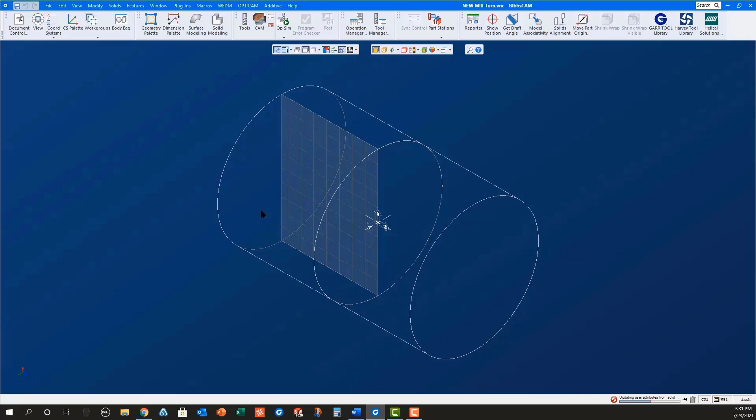In this case, I'm selecting a Doosan twin spindle as my machine before opening a SOLIDWORKS part file named New Millturn. Once the part is open, you will need to position the part properly in the main spindle. I find the easiest way to do this is to open the Coordinate Systems dialog and select XY plane for the main spindle. With Face Select turned on, select the front face of the part before right mouse clicking to align face to CS.

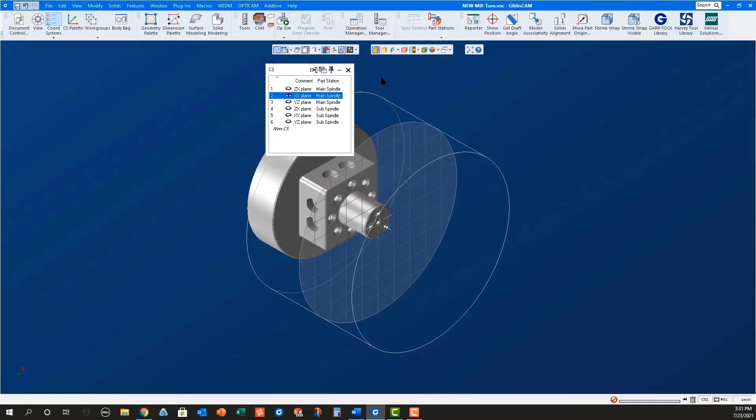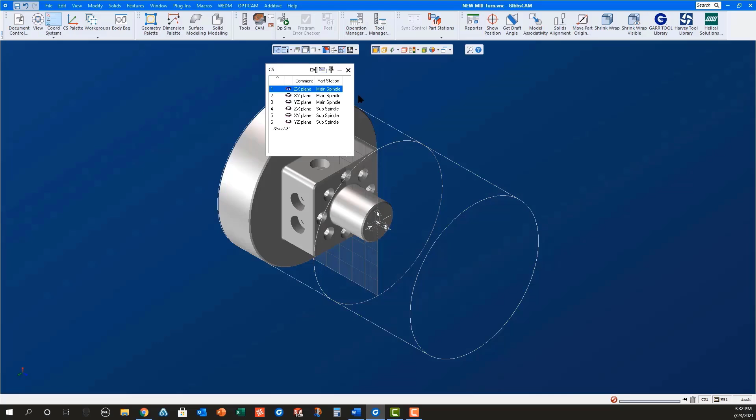Now use Modify Shrink Wrap to set the starting stock dimensions. Open the Document Control dialog and set the desired XD and Z clearance values, and then set the graphic part face distance to 0. Double-click the solid model to place it in the body bag and rename it Part in Main.

Select the part in the body bag and use Ctrl-D to duplicate it. The new solid in the workspace is now selected. Use Modify Translate to move this new solid into position in the sub-spindle. This will always be the length of the part in the Z-axis as a positive value.

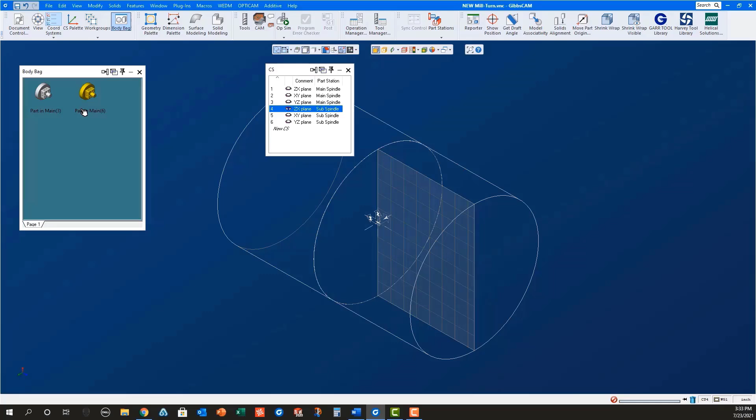Once this new part is in position in the sub-spindle, select the ZX plane in the Coordinate Systems dialog, right mouse click it, and change CS XYZ to make the solid belong to the sub-spindle. Double-click the model to put it in the body bag, where you can rename it to Part in Sub. Now double-click both solids to put them back into the workspace.

Open the Workgroup dialog. Rename Workgroup 1 to Blank since we will leave this unused. Click on New Workgroup and rename it to Check, as we will use this geometry to make certain everything is set up correctly for simulation.

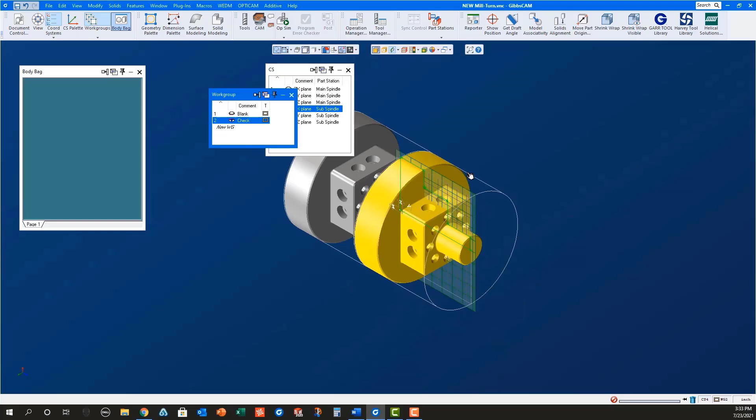With the ZX plane for the sub-spindle still active, turn on the profiler and Slice Spun Body. Select the green profile and then right mouse click on it to extract geometry. Now switch to the ZX plane for the main spindle. Select that green profile and right mouse click on it to extract geometry. Turn off the profiler.

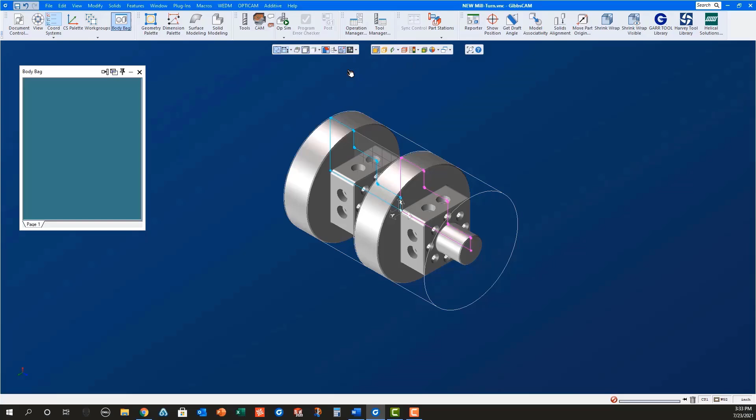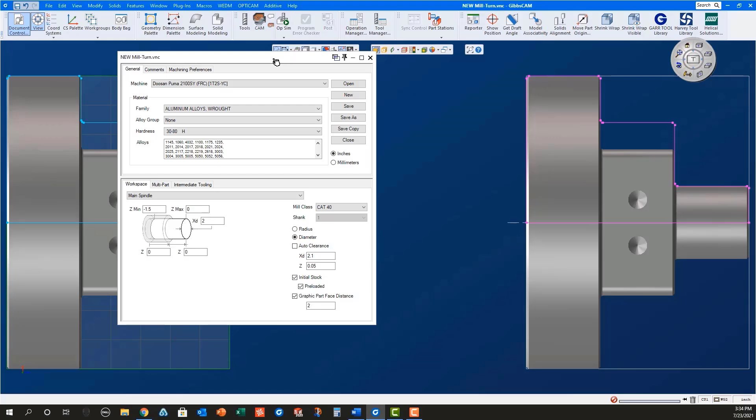Notice the geometry for the main is blue while the geometry for the sub is magenta. This is how GibbsCAM shows geometry in the active CS versus an inactive CS. Open the Document Control dialog and set the graphic part face distance to 2. Notice how the solid model and the geometry for the part in sub move with the stock for the sub-spindle.

While in the Document Control dialog, for the main spindle, set the Z max to 0.025. This will be the stock to remove with facing. Set the Z min to Z minus 1.65, which is the length of the part plus cutoff tool width plus stock amount to face in the sub-spindle.

For the sub-spindle, make sure Initial Stock is unchecked, since the stock is being transferred from the main spindle. Also, for the sub-spindle, set the Z max to 0.025. This will be the stock left by the cutoff tool to remove with facing. Set the Z stickout length to 1.025, holding on to 0.5 of material with the sub-spindle, with the part being 1.5 long plus 0.025 stock for facing with the sub-spindle.

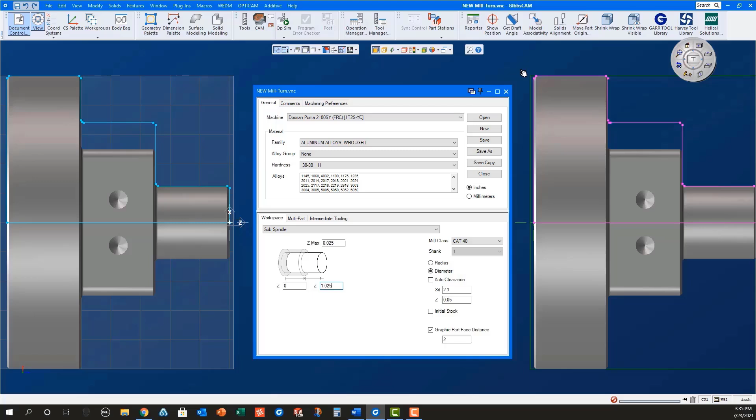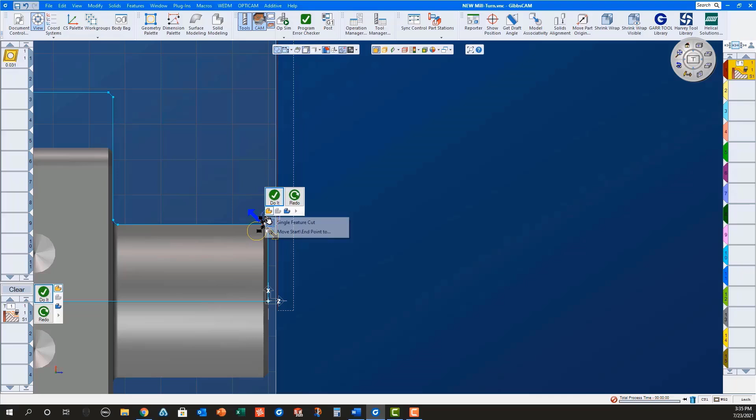Now that everything is set up correctly, we will program the part. First, I will load a facing process for the main spindle. Select the geometry, set the machining markers, and do it. Then I will load a turning process for the main spindle, select the geometry, select the machining markers, and do it.

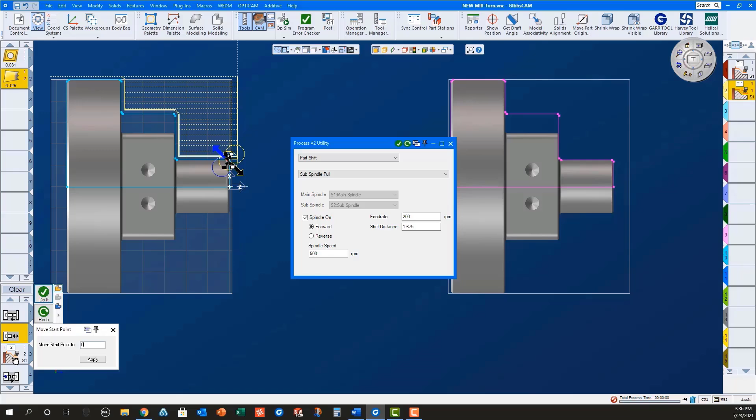Next, I will load all of the processes for picking off the part with the sub-spindle. These consist of a sub-spindle in process to a grip Z of 0.5, a sub-spindle pull with a shift distance of 1.675, which is part length plus cutoff tool width plus 0.025 stock for facing on the sub-spindle plus 0.025 stock for facing the next part, a contour part process with cutoff selected, and a sub-spindle return with part in main.

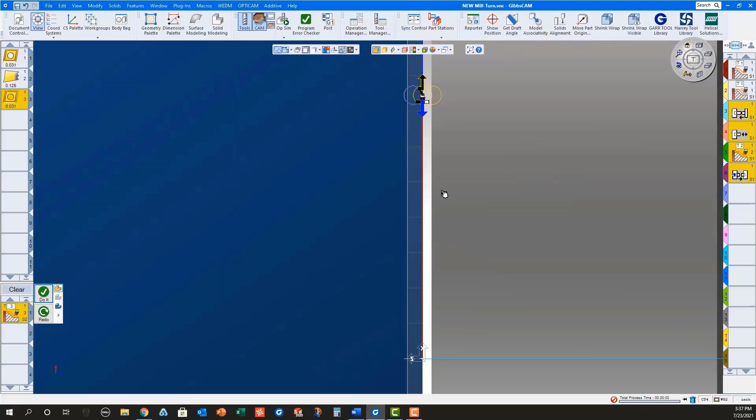I will select the geometry on the front of the part for the cut-off contour operation, and then do it. Finally, I will change the ZX plane for the sub-spindle, load a facing process for the sub-spindle, select the geometry, set the machining markers, and do it.

Using OpSim rendering with stop at part, load, unload selected, and overlay geometry turned on, I can clearly see that everything is set up correctly for machining in both the main and sub spindles.